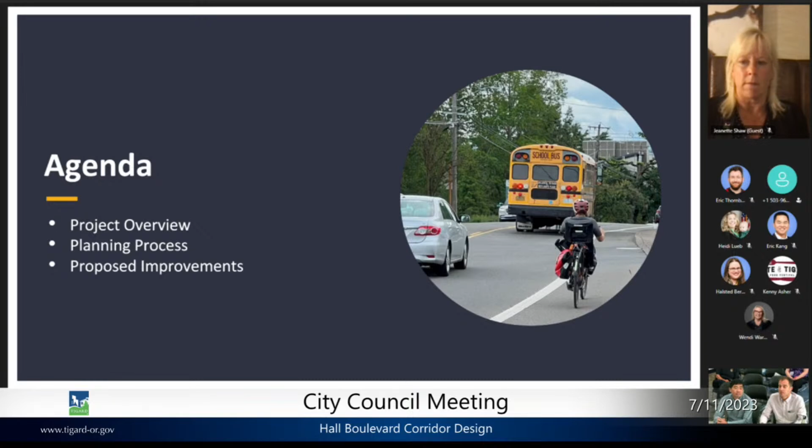And I'll go ahead and cover the project overview now. If you could go to the next slide.

The Hall Boulevard Corridor Visioning Project defines a range of upgrades and safety improvements to allow residents and visitors of all ages and abilities to move throughout and across the corridor to meet their daily travel needs.

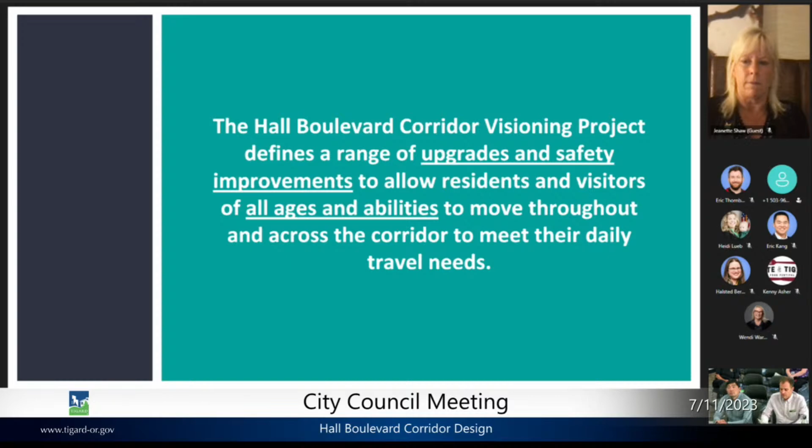Owned and maintained by ODOT, Hall Boulevard has long been the source of community complaints and known deficiencies in terms of repairs, with a history of minimal investment by the state. The city has long considered taking ownership of the road through a process known as a jurisdictional transfer to address a backlog of maintenance issues. And in terms of improvements, we know that to meet the needs of our growing community, additional improvements beyond state of good repairs are critical.

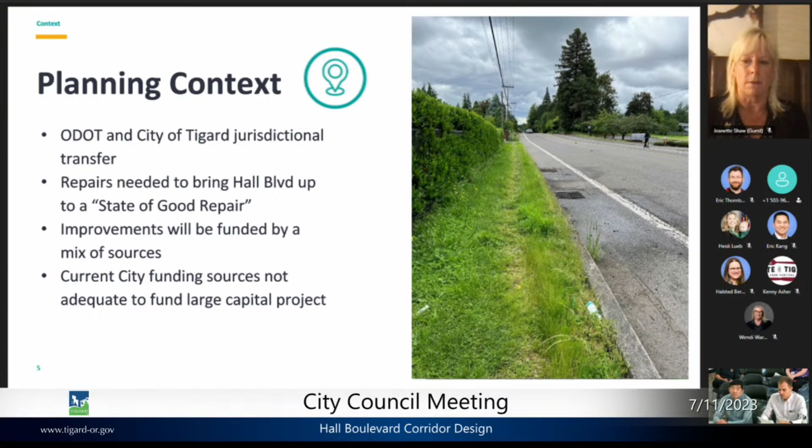We also know that the community needed a voice in defining these needs, and we needed an effective tool to communicate the community vision to support the case for additional investments.

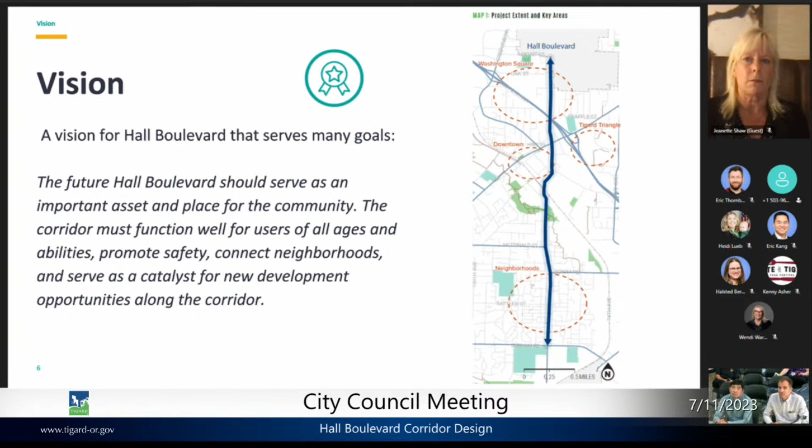This is our vision for the future corridor, and the vision and the conceptual design report really serve as a North Star for what the future of Hall Boulevard will look like in this community. The future Hall Boulevard should serve as an important asset and place for the community. The corridor must function well for users of all ages and abilities. It should promote safety, connect neighborhoods, and serve as a catalyst for new development opportunities along the corridor.

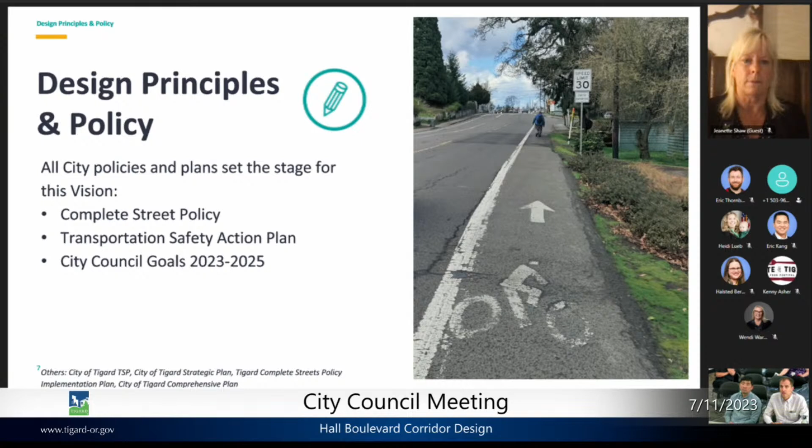I'll cover a few slides here on design principles and policies. The city has numerous adopted policies and goals and a strategic vision that are all foundational to the types of improvements we'll eventually see on Hall Boulevard. Starting with the Complete Streets policy, which really comes down to making sure that our investments and our infrastructure serve all users regardless of age, ability, or mode of transport.

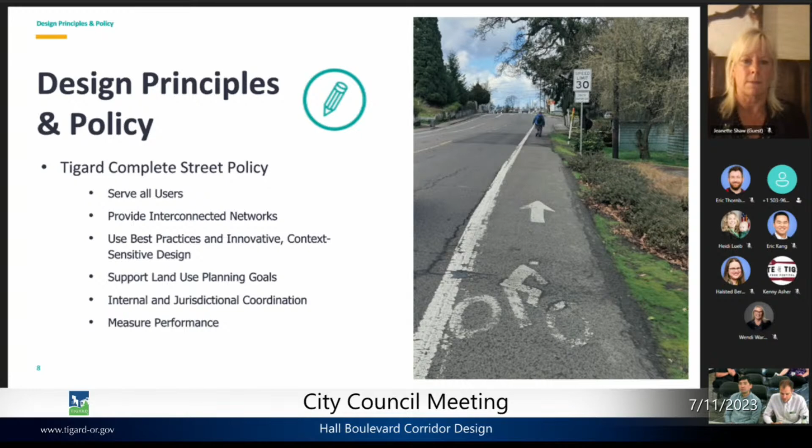We also utilize data and information from our existing Transportation Safety Action Plan. We will be advancing a new updated Transportation Safety Plan for the city, which you'll hear from us on in a couple weeks. This identifies critical improvement areas across the city where we're seeing higher incidences of crashes, and two of those locations are along Hall Boulevard. There's also a little footnote there.

Additional policy guidance comes from our 2040 Transportation System Plan, which was adopted in January of '22, and that document sets the future lane configuration of Hall Boulevard. So we have an adopted plan that tells us how many lanes Hall Boulevard should have in the future. The Tigard Comprehensive Plan is mentioned there as well, noting that transportation and land use need to be integrated fully, and Hall Boulevard touches some really key land use areas in the city, such as downtown.

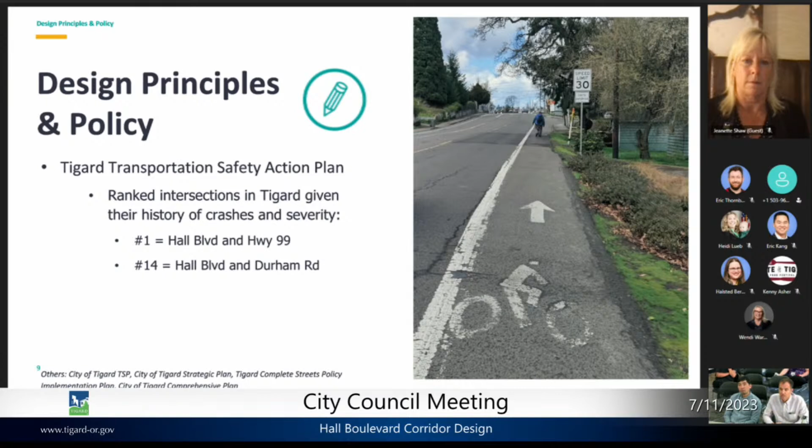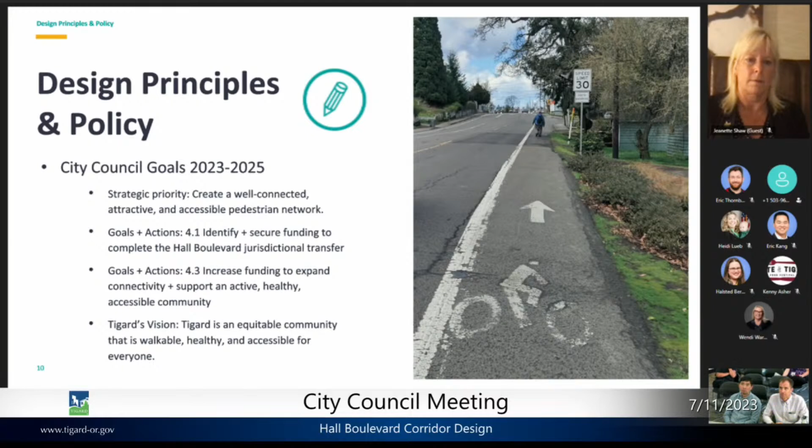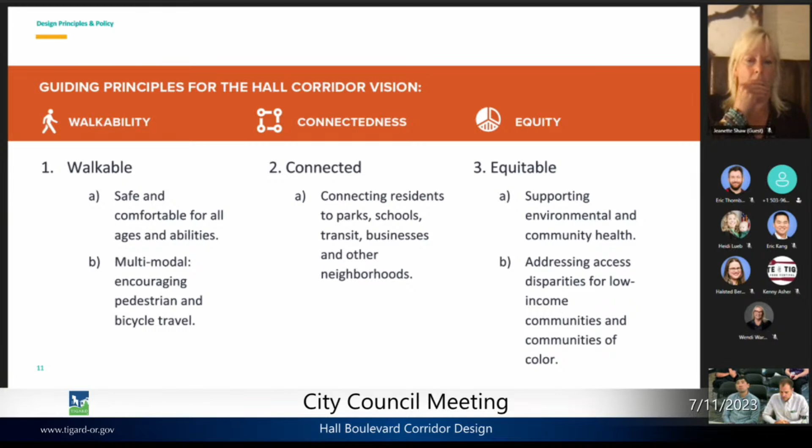Given adopted policies, it should come as no surprise that walkability, connectedness, and equity serve as guiding principles for this project. We use these principles to evaluate and test the proposal documented in the conceptual design report, ensuring the concept design supports these principles.

I'll talk a bit about the planning process. In terms of existing conditions, this provides a little background, which is also described more fully in the agenda item summary for tonight. The city has conducted two prior condition assessments, starting with the first one in 2016 and then an update in 2019, to gain a better understanding of the liabilities associated with Hall Boulevard—what the city would be taking on in terms of this asset if under city ownership.

Over the past two years, the city and ODOT have partnered in developing an agreement on what's known as a state of good repair cost estimate. This is the amount of funding needed to fix what's out there today. The 2019 assessment report served as the real kickoff for that relationship and conversation with ODOT, and it was a very effective tool in getting our partners at ODOT to move on this and prioritize it in their own work plans.

So again, this is the base level investment needed, and it amounts to $30 million if it were implemented today, independent of other needed improvements.

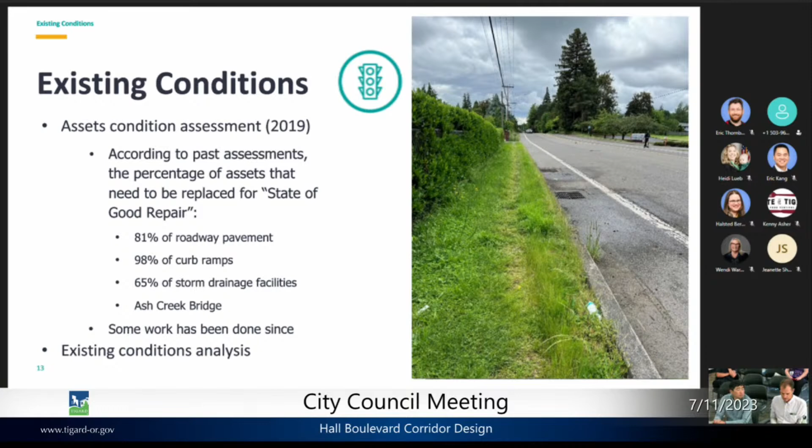In terms of public engagement on the project, this really falls into two rounds. We built off of the existing conditions work and brought that out to the community to share what we knew about the roadway, and to hear what issues they're having in their day-to-day use of Hall Boulevard, from whatever perspective they may have, as a neighbor, someone driving the corridor, someone trying to walk across it, or a transit user. Round one consisted of a virtual open house due to COVID restrictions, and we had an online input map, shown in the image here.

We also conducted stakeholder interviews. During round two, we refined and brought out some early proposals, refined through a second open house, in person, held here in Town Hall—this was our first in-person open house post-COVID, or at least mine in a couple of years. It was nice to actually engage with the community in person. We also held another online input map for two weeks after that open house where people could submit comments.

We shared monthly updates and took feedback from TTAC. We also had numerous one-on-one discussions with interested community members, both in person and over the phone and email. I should also highlight that our engagement activities were underway during significant media attention on Hall Boulevard—we were conducting walks with elected officials and community leaders, visits by state and federal lawmakers—and this was also happening during significant state legislative action on the House bills I mentioned previously.

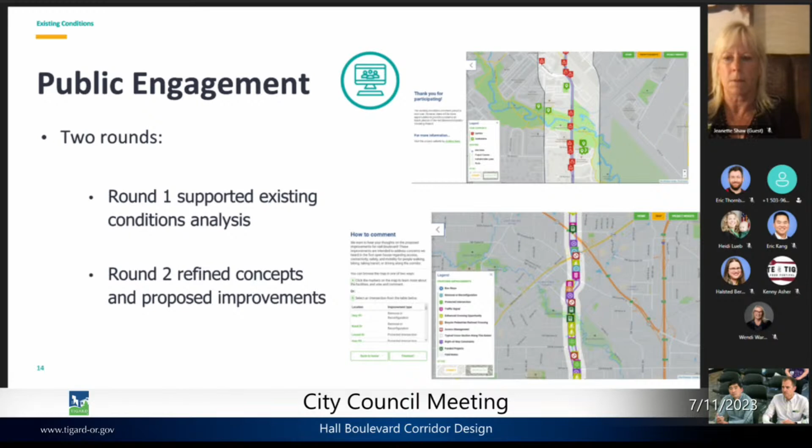So we took the information we received from the public during our engagement process and developed some concepts. These were informed by both the existing conditions analysis and work, and the feedback we were receiving. We generated design alternatives, refined those with public input, and the planning process resulted in a high-level concept based on both the guiding principles and the feedback we were receiving.

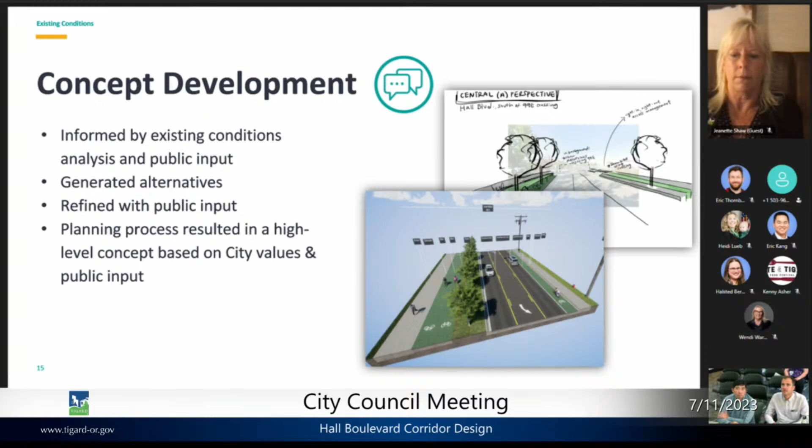That concludes my portion of the presentation. I'm going to hand it over to Derek to move us forward through the actual concepts that will be in the CDR. Thanks, Dave. Next slide, please.

Okay, so as Dave explained earlier, the CDR, the Concept Design Report, is the culmination of this body of work that we've been working through over the last year, and is really intended to define and summarize our process and the concepts we're proposing moving forward to address all of the goals and objectives that Dave laid out earlier.

Really, this document is aimed at giving folks a great idea of the potential for the corridor in response to all of the safety needs, the connectivity needs, the access needs, and the comfort needs—the experience of folks along the corridor today and what we want that to be in the future. So we're really trying to capture that vision and that excitement for what this corridor, Hall Boulevard, could function as tomorrow.

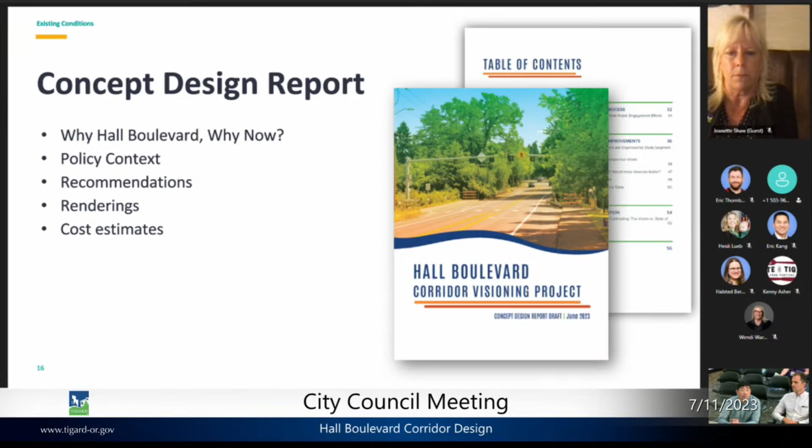It contains a lot of the things you see here on the list, but again, focusing on the proposal, on the recommendations, and then we've got a series of very high-level, planning-level cost estimates associated with those improvements. So I'm going to walk through the corridor itself to describe and summarize the types of improvements you'll find when we deliver the report in a few months.

Okay, so the way we're going to explain this evening is to try to break down this entire corridor into a number of segments. Those segments are defined by both what's out there today in terms of transportation facilities, but also the land use context—what are the types of destinations folks want to access along each of these segments, what are some of the tricky or challenging facilities that may be out there today that we need to think about with these improvements in mind. We want to create a context for each of these segments that's really going to be responsive to the needs and the future improvements we think are suitable out there.

So for each of these segments, we're going to show you a proposed cross section, and we call this a typical cross section because it isn't intended to represent every square inch of that segment, but is really intended to give you a good idea of what you can expect for most of that extent. I'll welcome comments as we go through this, or we can take them at the end.

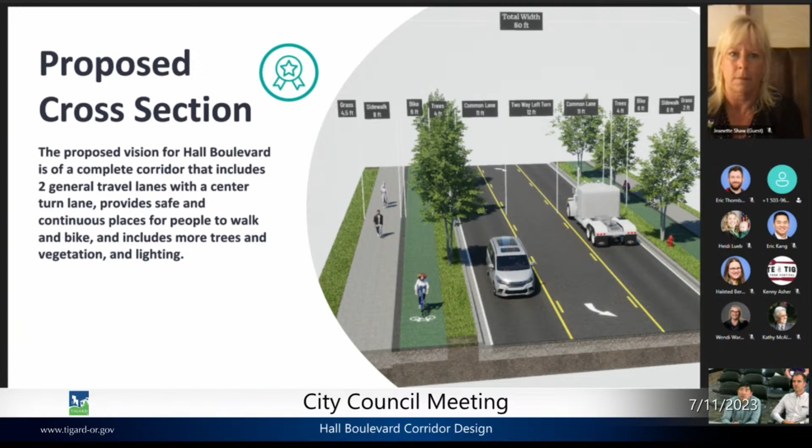And I'll also mention, the dimensions that you can see if you squint and zoom in here a little bit are really sort of intended as a starting point, a baseline for what we consider to be an appropriate dimension for each of those zones, let's call them. They could be wider, and in some cases they might need to be narrower, but we wouldn't want to make them so narrow as to compromise the experience, the safety, or the comfort of users in each of these zones.

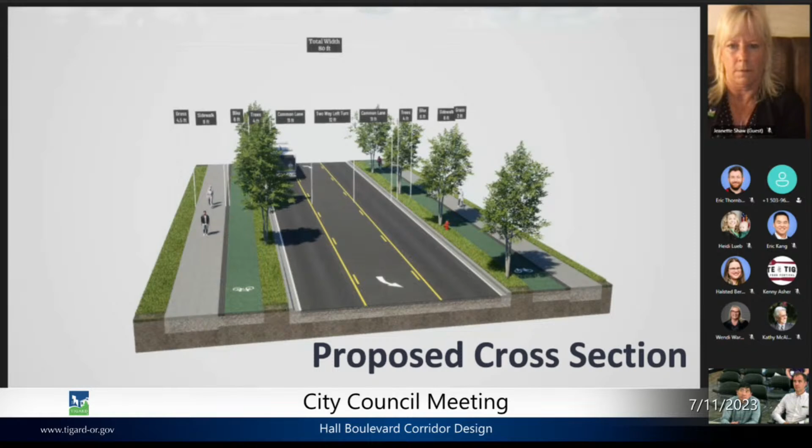Okay, so talk a little bit about the extents of the entire corridor. So we're going all the way from Durham Road in the south, north to Locust Street, to the city line. We're defining 4 different study segments, so we've got 4 typical cross-sections that we'll talk about.

And then in addition to that, we're identifying a number of intersection treatments, intersection improvements, and crossing recommendations, typically in locations where we don't have a marked crossing or some kind of enhanced crossing treatment for pedestrians to cross the street today. So the idea here is that even though we've got 4 discrete segments, we need there to be a level of consistency, a level of continuity between these segments. There's going to be, as I mentioned earlier, a degree of similarity between them, because we want that to be as intuitive, as understandable as possible.

As Dave mentioned, this is really about multimodal facilities. We want to provide options, travel options for different people, regardless of how they're getting around, right? So that includes access to transit facilities, that includes turn lanes, that includes protected bike lanes and wider sidewalks. It includes all of those things. We want to accommodate the variety of modes in a way that is, again, going to provide for not just a safe experience, but a comfortable one as well.

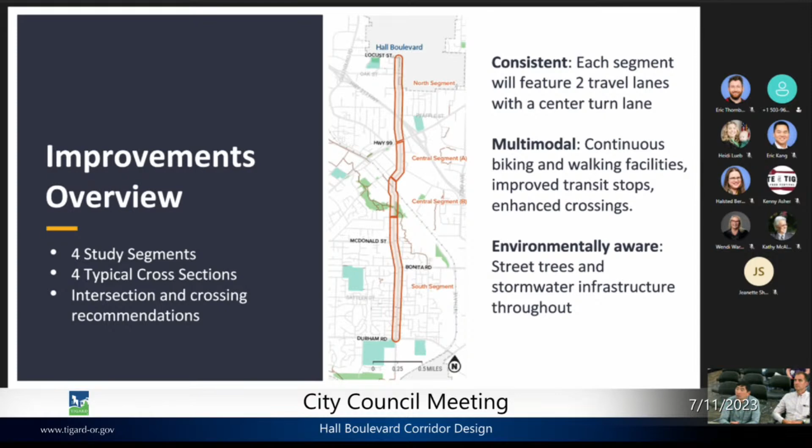Okay, so we're going to talk a little bit about some spot improvements for each of these segments. But before we do that, I want to explain some terminology. You're going to hear and see the term protected intersections. I don't know if that's a concept you're all familiar with, but this is a fairly new design of intersections to better accommodate people walking and biking.

Without going into too much detail, I'll just say this is a design that can be adapted to a lot of different conditions, to a lot of different conflict types, to a lot of different issues we see at each intersection. So they're not all going to look exactly like that, but variations on a theme. That's what I mean when I say protected intersection.

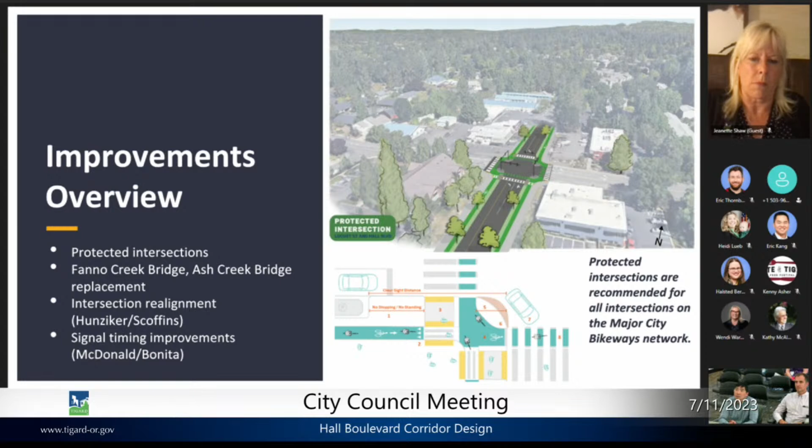This is, of course, a location that has been studied to greater depth in previous efforts, including the Southwest Corridor Conceptual Design Report. Next slide.

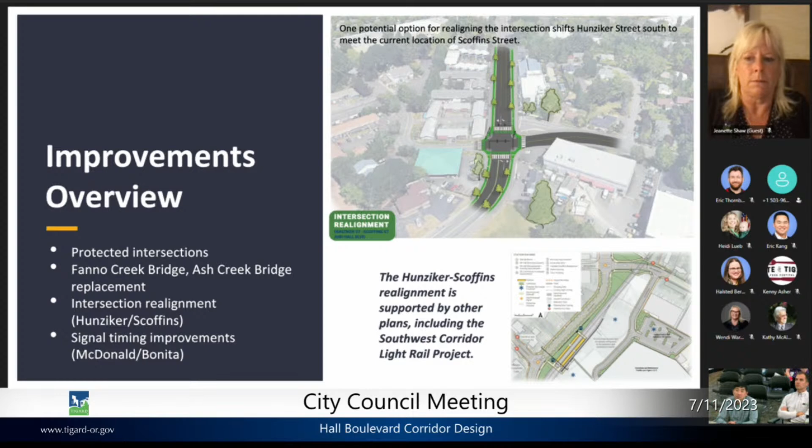Okay, so the first segment, the north segment, going from top to bottom, is a fairly straightforward one. We're talking about Locust to the north, all the way down to Highway 99. Again, the cross-section is three lanes, a lane in each direction, a center turn lane where it's needed, and in this case it's along most of the corridor. Some landscaping, a buffer with some plantings and trees, what we're calling a cycle track or a raised protected bike lane—a bike facility at the sidewalk level, adjacent to a sidewalk on both sides of the street.

That's the general, typical cross-section for what amounts to about an 80-foot right-of-way, an envelope edge to edge. If you look at the callouts on the right, there are a number of enhanced crossing opportunities—adding marked crosswalks, potentially curb extensions, or in some cases a median refuge island. And in a couple of instances, a rectangular rapid flashing beacon. This is a beacon I'm sure you're all familiar with—it has a very bright, very attention-getting pattern, a very high compliance rate, a very good tool in our toolkit.

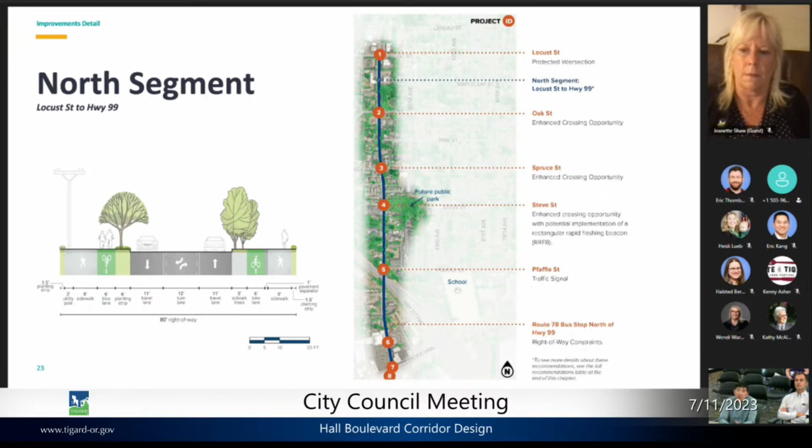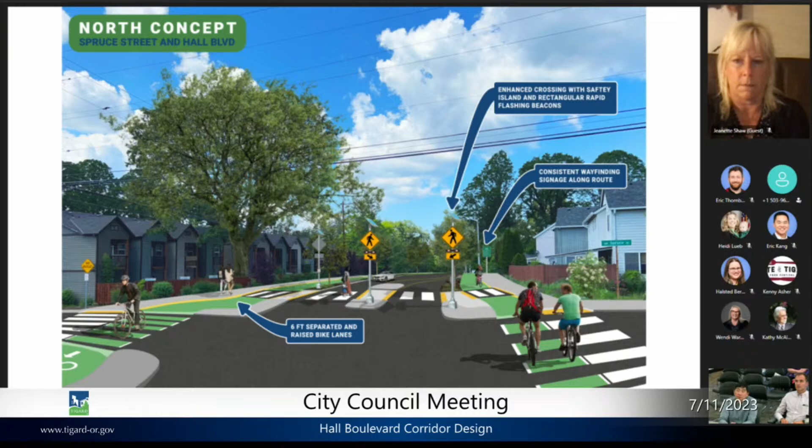The central segment is one we divided into 2 segments as we got further along in our process. So we're calling this northern central segment A, and the one to the south would be central segment B, which we'll go to next. This one is interesting because we're in the downtown now - we've crossed Highway 99 and we're heading south.

Here we've got a number of issues with the segments along, north of call out number 10 here, let's call that north of Knoll, where we're receiving a lot of traffic off of 99. A lot of that traffic is turning and heading to destinations, heading to downtown, and some of that traffic is just using it as a bypass, right? One way to address the flow of traffic and make it more predictable along this segment is to think about how we reconfigure the lanes we have out there today, the orientation of those lanes, and how they're really functioning.

So some of the improvements we're proposing along this stretch include removing things like the slip lane at Highway 99 - that's a channelized turn lane that allows higher speed vehicle turns onto Hall Boulevard. We're also controlling the access points to certain properties and certain side streets to again create a more predictable environment for vehicles turning onto Hall Boulevard or turning off of Hall Boulevard.

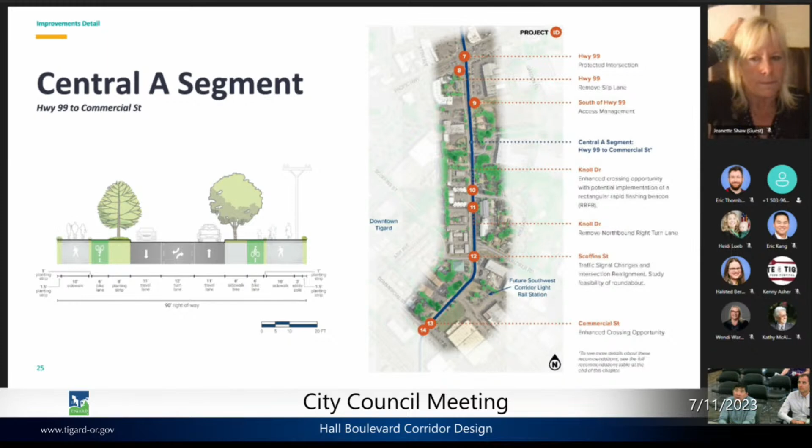So that's the central segment A. We'll go to central segment B next. Go to the next slide.

So this stretches from Commercial all the way down to Omara, near the library there. And this is a segment that is probably the most different from the other three.

At the cross section there, what we're showing is a wider sidewalk. Instead of a directional or one-way bike facility, we've got a two-way bike facility on that side of the street, buffered by some generous landscaping and plantings from the roadway itself. On the other half of that cross-section, it's more or less what we've got today - a bike lane striped on the street, and then a sidewalk.

So the idea here is that we want to concentrate a lot of the activity, a lot of the walking, biking, rolling activity in particular, on that west side of the street, on the west side of Hall.

And the thinking behind that is really twofold. We want to really emphasize that side of the street because, A, that's the side of the street where we've got the majority of destinations - City Hall, the skate park, the Fanno Creek Trail, and then the portal to access downtown.

So thinking that that would provide that all ages and abilities facility for folks who are connecting through the downtown and to the south.

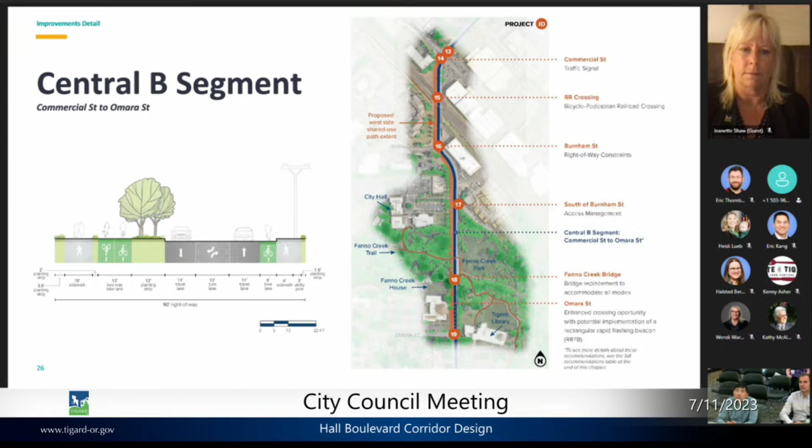You've got your two-way bikeway - this time it's on the right side of the screen, that's still the west side. And then you've got the additional bike lane and sidewalk facilities on either side.

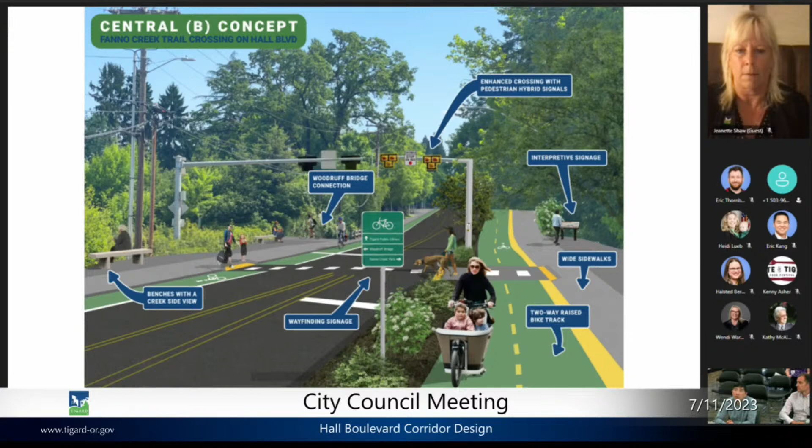Next slide. Okay, so that's again another view of that typical cross section. Next slide.

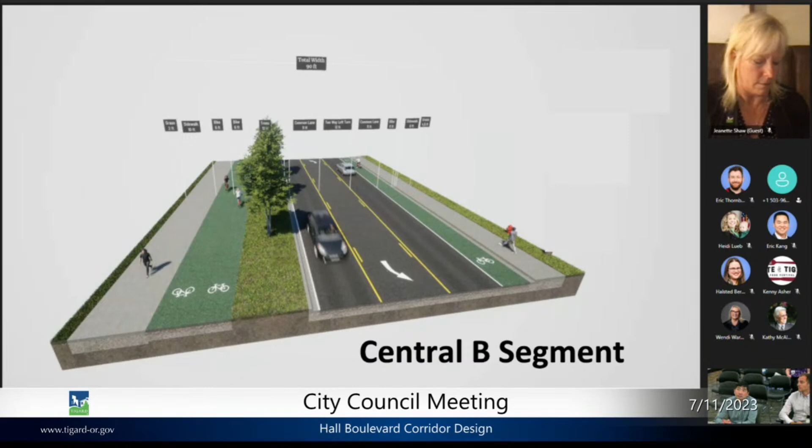You'll find that in some places we're going to deviate from this because we've got a little bit more space to work with. And in some locations in this segment, we actually have to narrow it a little bit because we've got more physical constraints. The actual width of the roadway and the right-of-way begin to shrink down, and so we want to be really thoughtful about how we do that without compromising the function of each of these pedestrian, bicycle, and roadway facilities.

So in some cases, maybe that buffer is going to shrink a little bit. In some cases, the center turn lane might go away. And in other cases, the sidewalk might shrink a little bit, right? But we want to provide a facility that is going to function and be intuitive and continuous as much as we can.

So here, many of the improvements that we're calling out are new crossing opportunities. This is a segment of roadway where those marked crossings, those enhanced crossings, are a lot fewer and further between. So we've thought a lot about where to locate them, again trying to give them a predictable interval, spacing between crossings, and spacing between signals, just so that folks have a general sense of where their next crossing opportunity might be, without having to think about, oh, do I jaywalk? Do I run across the street? Because it's easier, right? Make it predictable, make it understandable, and make it very clear for all of the road users where that activity is going to happen.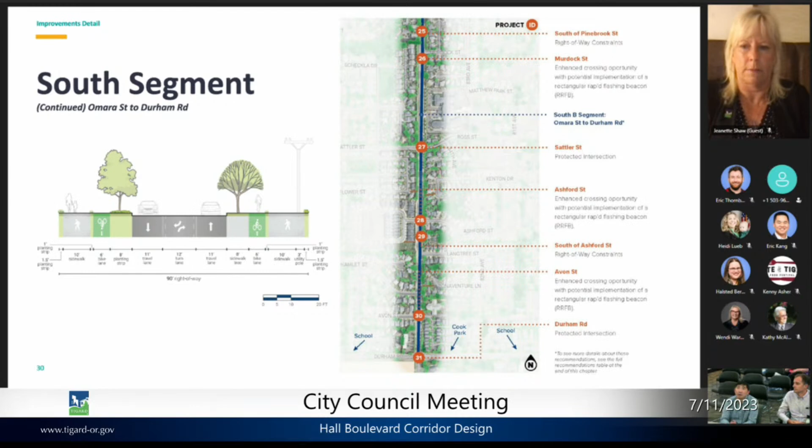Okay, so I think that's the last of the, oh, there we go. So there's another typical cross-section. That's the last of the improvement slides we've got.

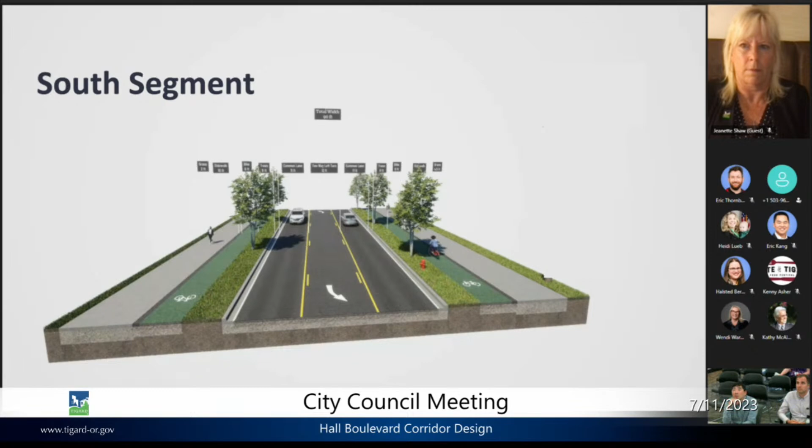The next few slides, if you could advance to the next one, it's going to give a quick rundown of the costs that we've generated. Again, very high-level, planning-level cost estimates that are really only intended to give us a rough understanding of the ballpark, what is this going to cost?

And the relative measure of the construction costs, those capital costs, to things like design and engineering, we've factored in a healthy contingency as part of that. When you add that up together, the 61 million in construction costs, hard costs, with the 52 million in soft costs, let's call them, the grand total is in the rough order of magnitude of 113 million.

It's a big number, and with that 40% contingency, it's going to be a big number because we're so early in this stage of planning that we would need much further design and study to refine that and hone in on a more specific target. So the contingency is big, and that contributes to that higher cost.

That 113 million, again a big number, does not account for the 30 million in state of good repair that Dave mentioned earlier. So potentially there's a lot of overlap for us to think strategically about how we could apply that 30 million in state of good repair funding to some of the improvements we're identifying as part of this process. So again, that 113 million is separate from the state of good repair amount.

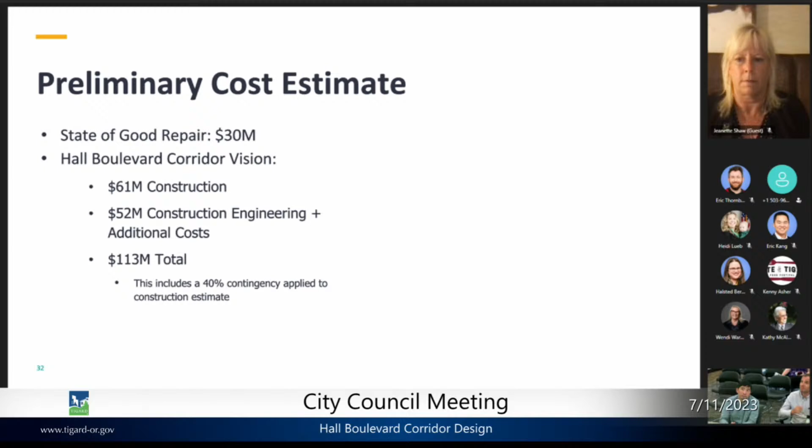Thanks, Derek. So over the next couple months, we'll be finalizing the conceptual design report, and it'll be good to hear some feedback from you, and we can take feedback tonight and also additional feedback later. We'll return to City Council later this summer or early fall, seeking a resolution in support of the CDR. That will help us down the road if we're going after federal grants or other funding sources to implement some of the improvements you see in the CDR.

We'll be continuing our work on the jurisdictional transfer of Hall Boulevard, continuing our partnership with ODOT, and setting up our strategy over the next couple of years, getting ready for the next year and a half, really, getting ready for the next long legislative session where we anticipate a larger transportation package where Hall could conceivably be at the top of the list for a transfer. And then we'll also be identifying funding opportunities we can go after to implement some of those improvements.

So with that, I think we're at the end of our presentation and happy to take a few questions. I know we're a little bit over time. It's okay, that doesn't bother me. Do you have any questions, Councillor Singh? Yeah, well, thank you, Mayor. Thank you for the presentation. That was really excellent, I have two questions or comments.

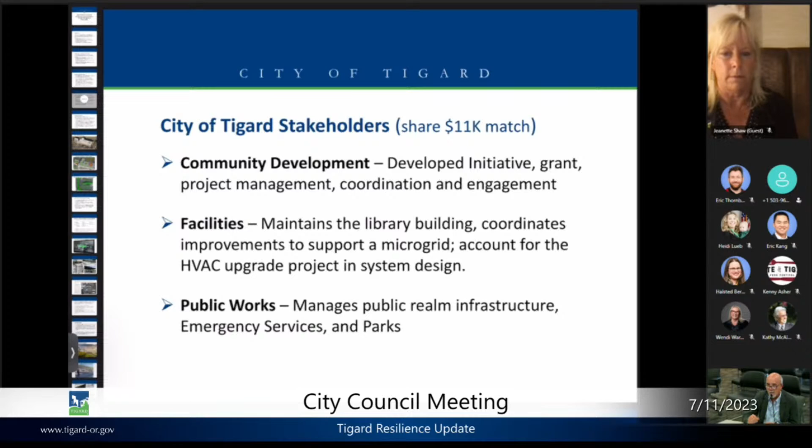So briefly, three tiers, different scales. The library as an emergency operations center, or a backup emergency operations center to the Public Works location, offering redundancy to the city, and the IT server backup and heating and cooling for climate situations. That will consist of rooftop and parking lot canopy.

Generation and battery storage. And the public realm was more about where you can, with 25% of the city in public ownership, rights of way, parks, facilities, there's a good opportunity there to have energy generation, distributed energy resources, and the Tier 3 district scale, a very conceptual idea about how you can scale this up to increase your resiliency benefits and sustainability impacts.

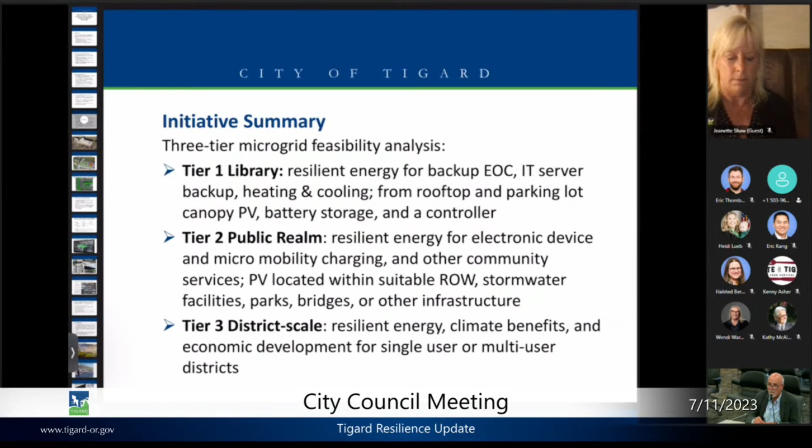So for Tier 1, the library is the location, rooftop PV and parking lot PV, and to the right of the image is where the location of a generator currently is, which would be expanded for a new gas generator and the battery for the microgrid located there.

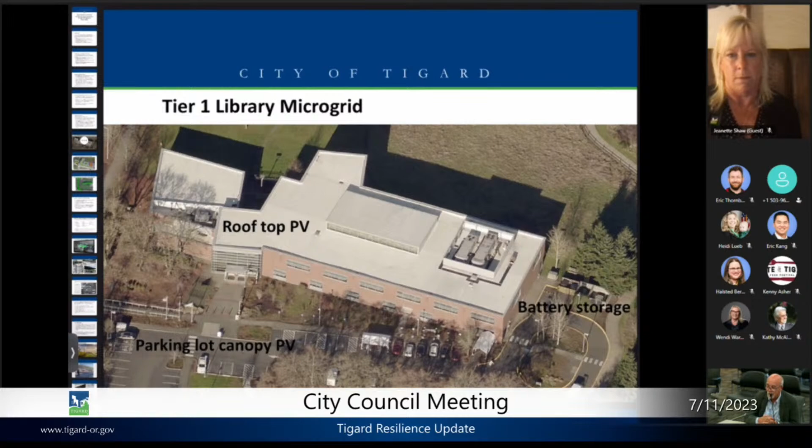PAE's analysis of rooftop solar generation in this configuration of PV, both over the community center and over the main building.

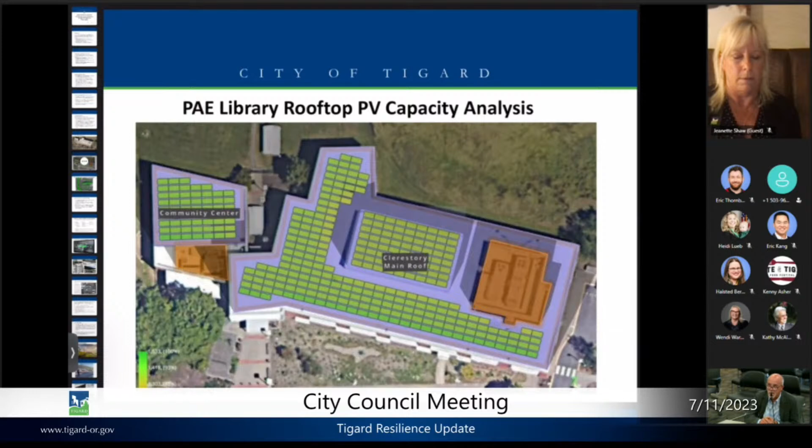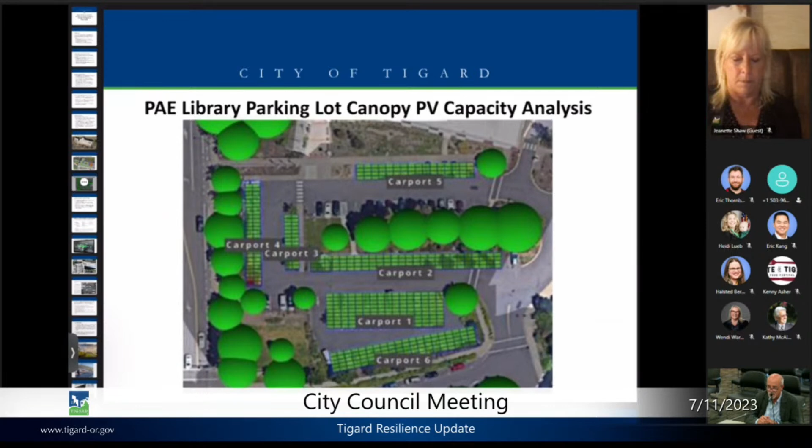So basically, rooftop PV is more cost effective, but parking lot PV doubles the amount of energy generation here, which is significant for the resiliency goal.

The analysis on the library looked at various scenarios here, both in terms of the battery size and the photovoltaic arrays, the load profiles, whether you're serving just an emergency operations center functionality or whether you're also serving the building load itself, the greater library building and its uses, and different outage scenarios: 24 hours, 7 days, 14 days.

These are looking at a range of circumstances in a climate change scenario with wildfire and whatever that would bring the grid down, but also the Cascadia earthquake potential for long-term outages. So the conclusion was that the whole building resiliency strategy is the most economically feasible and achievable, with a reasonable battery size coupled with the generator, the gas generator proposed for this site for resiliency in winter months.

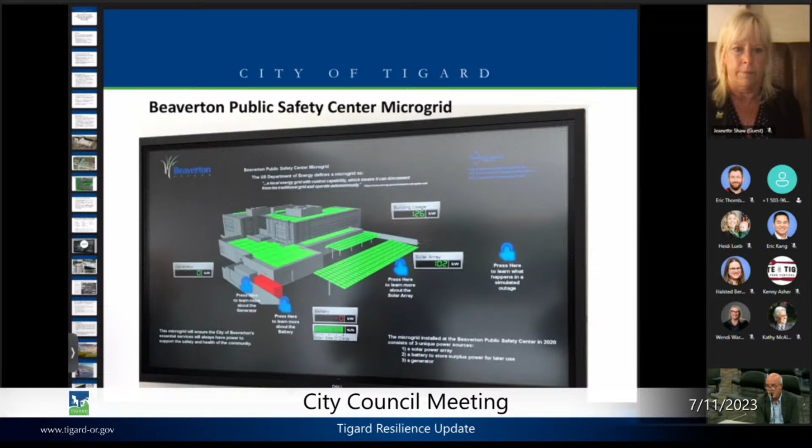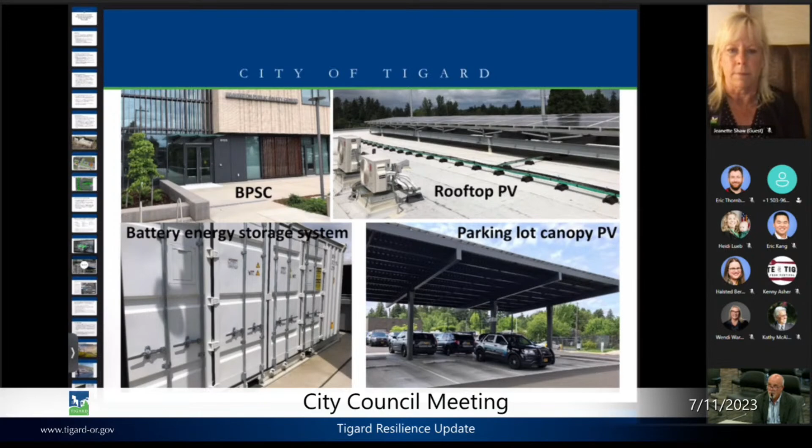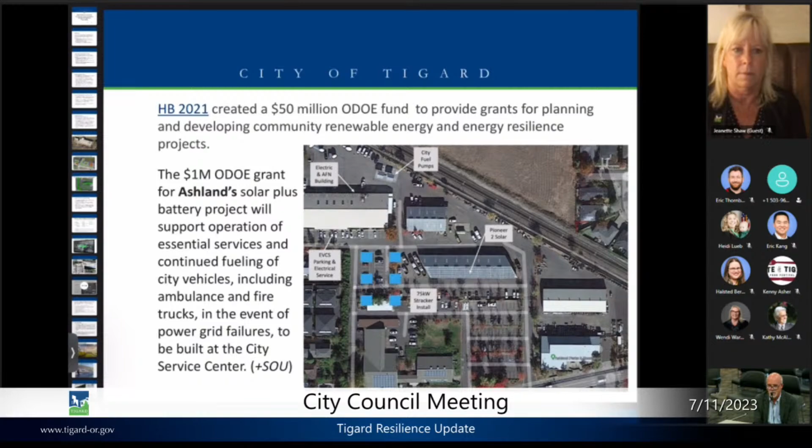So, next steps for Tier 1. PAE's report, which you had in your packet, is now in Energy Trust of Oregon's hands to get a trade ally to price that, so we don't have physical impact with this. This presentation is an update, an introduction. That will be followed in the fall when we get the results of the costs and the basis of design. Energy Trust of Oregon is a very important partner here, taking PAE's technical research and evaluation and helping the city implement it, both in terms of costing, who's doing what, identifying funding options, granting, tax measures, and a variety of grant applications.

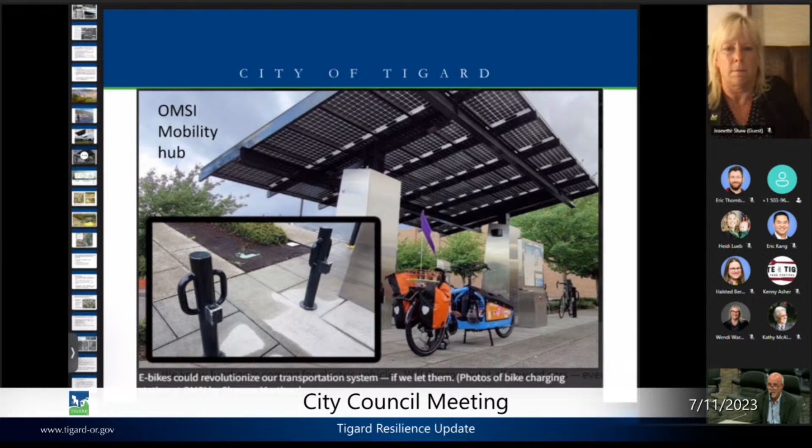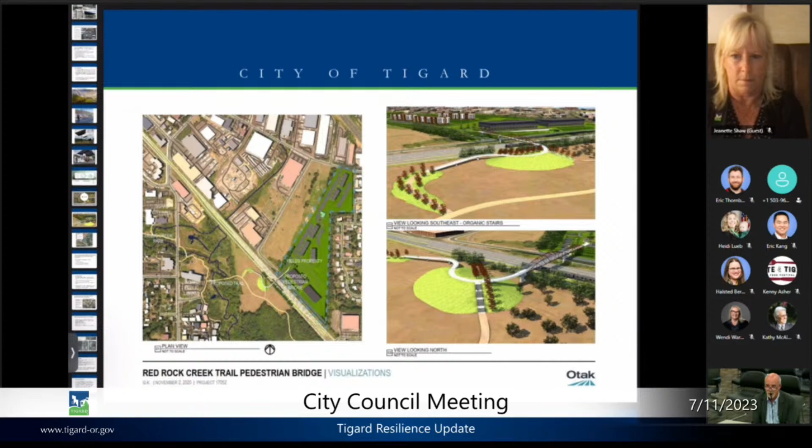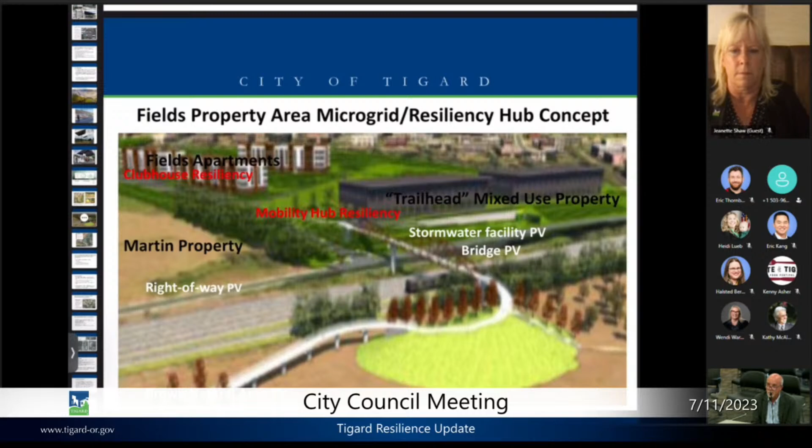So we're looking at the existing Fields Apartments, the five buildings in the upper portion here, and in the middle is the clubhouse that's labeled Resiliency Hub. The idea is that in combination with the public realm distributed energy resource generation and rooftop solar on these buildings, it could power a resilient hub, with battery storage, for use by the affordable housing residents.

And the lower in the picture is the resiliency hub for active transportation, and two buildings identified for future development there. Thinking that the resiliency hub could be integrated in that development, which is subject to a plan development review eventually. Next slide, please.

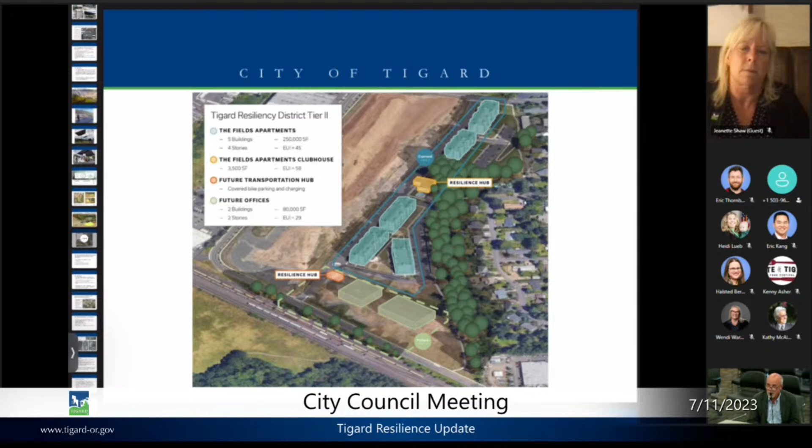So that's one potential application for a microgrid in sort of a neighborhood configuration. But there would be others in the city that council could consider either applying additional microgrids to, or in lieu of, if they prove to be more valuable.

Like water facilities. The water pump needs resilient power. There's a generator there, but for long-term outages, say in an earthquake situation, perhaps the renewable energy fueled battery through a microgrid would be useful.

And distributed energy resources in greenways, parks and park facilities, resilient park facilities, public works, and parking lots are in the public realm. City Hall, police facilities and parking lots, our new campus here in downtown, would be a good candidate for, like the Beaverton Safety Center, for microgrid development. Next slide, please.

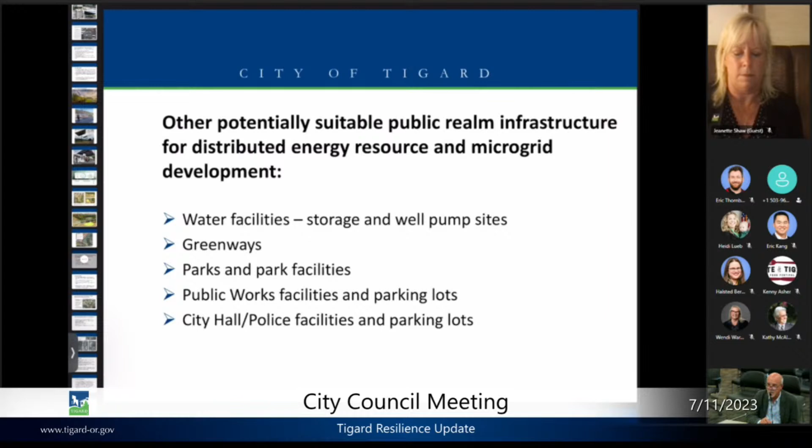So attached to the AIS was the PAE Energy Resilience Report. I'm sorry, we're in Tier 2. We expect that there will be, by the end of the contract, at the end of this month, the design by PAE summarizing these options and these resiliency hubs.

And then we would take that result, if positive, and engage with the Fields apartments to see if they would be interested. They already are aware of this and indicated they would be interested. But this would be sharing the results with them, and then using this information to apply for a planning grant to develop the project. Again, this has the potential for meeting some of the 50 megawatts of installed distributed energy resources that would be the climate action planning goal.

Next slide. So the district microgrid, this is the most conceptual tier. Not a lot of example of this to go on.

We'd be breaking some ground here. Originally conceived as the Hunziker Core District, which includes the Fields property, and could be expanded to include this area. A study by the Sustainable City Year U of O MBA program last year sort of didn't rate the feasibility of this area very highly, in part primarily because of the multiple user character of it. A single user microgrid, like city ownership at the library, single owner, single building, is very manageable for load allocations.

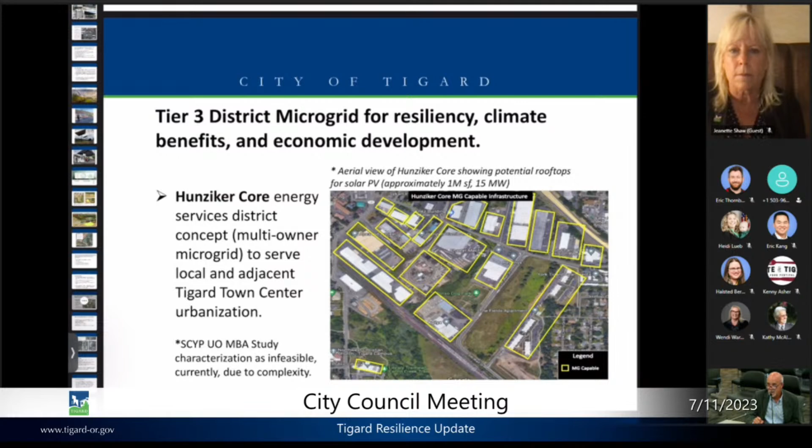We can look at other potential district-scale microgrid locations that avoid the multiple user issue, like Macerich, Pac Trust, and Clean Water Services, all having large land and building inventories that, if they found this valuable, we would want to share the results of this investigation of district-scale microgrids with them to see whether or not they would be interested in pursuing the resiliency and sustainability benefits of a microgrid, and then perhaps write a grant that would be specifically applicable to a district that was more feasible.

Next slide, please. Just an aerial depiction of each of those, showing significant rooftop in Pac Trust, and the large redevelopment site at Macerich, which includes the mall, which has no PV on it, I don't think. On the other hand, the CWS district does have an existing solar array, and they could augment that.

And we have equitable goals in what we do, so the Greenburg neighborhood would stand to benefit through a microgrid there. Next slide.

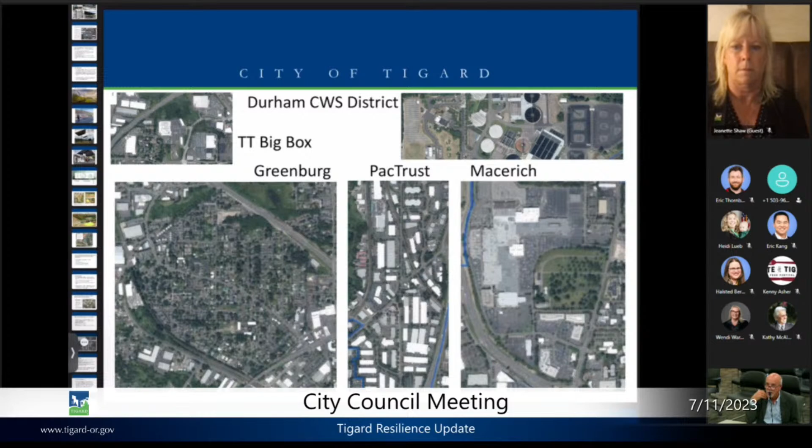So next steps for Tier 3. We're expecting PAE to deliver a high-level concept by the end of their contract that we can then share with district stakeholders and look at a grant application potentially that would flow from that. Again, significant opportunity here to help meet our distributed energy resource goals of the Climate Action Plan. Next slide, please.

We hope that this introduction raises questions in your mind, and that you would consider supporting a construction grant and utility agreements for the library in Tier 1, and that the public realm microgrid concept involves how the city imagines using its right-of-way and its facilities for distributed energy resource generation to meet climate goals. And Tier 3, one of the districts that we control as a city could be centered on downtown, where we have the urban plaza, the senior center, the library. If you draw the boundary, it includes the library and even the Fields property in sort of a crescent shape there. This has the benefit of providing a context for incremental microgrid development, so that on a planning horizon of 2035, funders and utilities can see how ambitious the city can be in creating distributed energy resources, sustainability, and resilience.

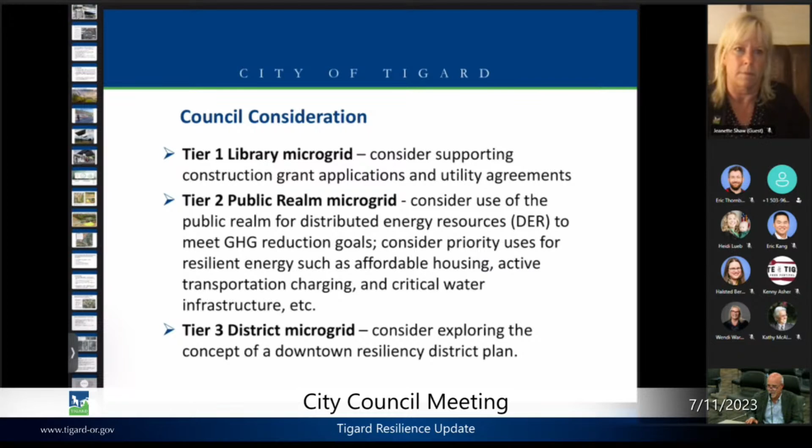Thank you. Next slide. Questions? That's a lot of information.

Our Council President? Thank you, Mayor. And Karina Hirschberg will join me, because I know, Councilor Hu, you will have technical questions, I'm sure, from the report that was part of the AIS. Well, don't hold back. No, is it on? Actually, my questions may not be relevant.

If I may, so how resilient are the new power generators at the library? The 500 kilowatt gas one. So is it going to survive an earthquake?

Kevin can also have an opinion about that, but let's say there was a Cascadia earthquake that limited the supply of gas, either broken pipelines or bridges are out, so you can't get that. There would be an on-site supply, but that would be of limited duration. But together, you could work both the battery storage and the gas storage that you have to get the best resilient outcome.